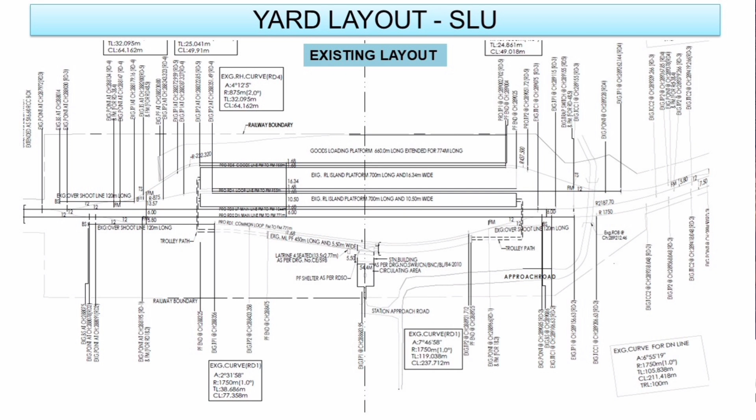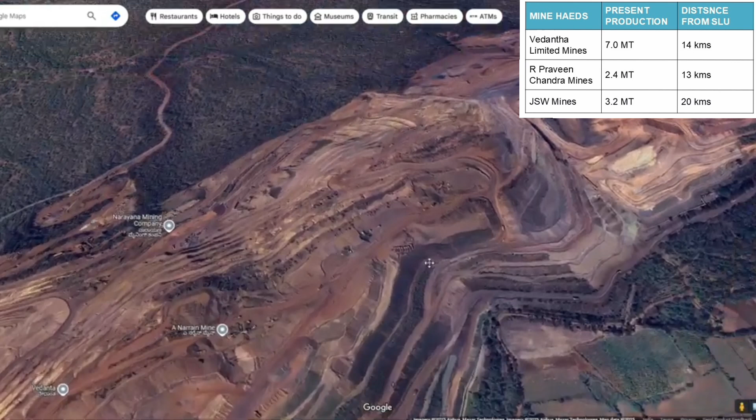Sasalu is a village located in Holalkere Taluk, within the Chitradurga district of Karnataka. The region is strategically significant due to its proximity to iron ore mining zones, which are among the most active in the state. As such, Sasalu serves as a vital node in the transportation of extracted materials by rail. Its development is not only essential for local operations, but also contributes to the larger mineral logistics network in Karnataka.

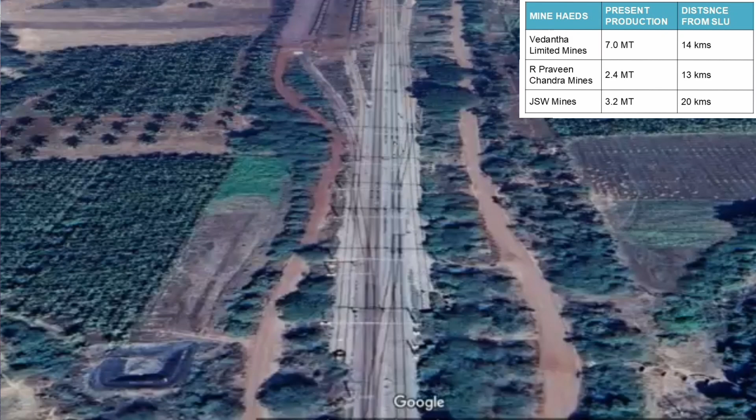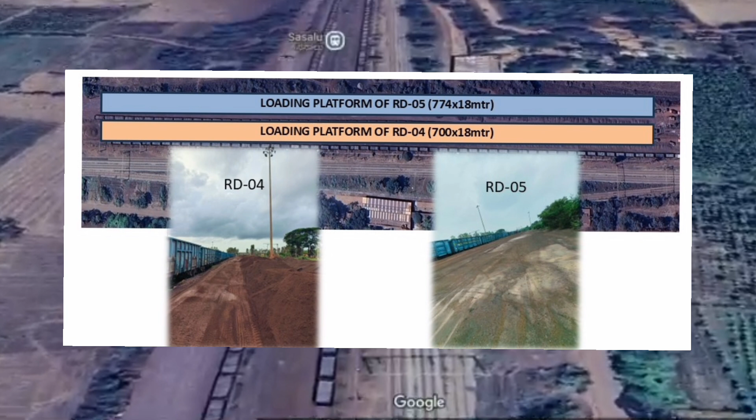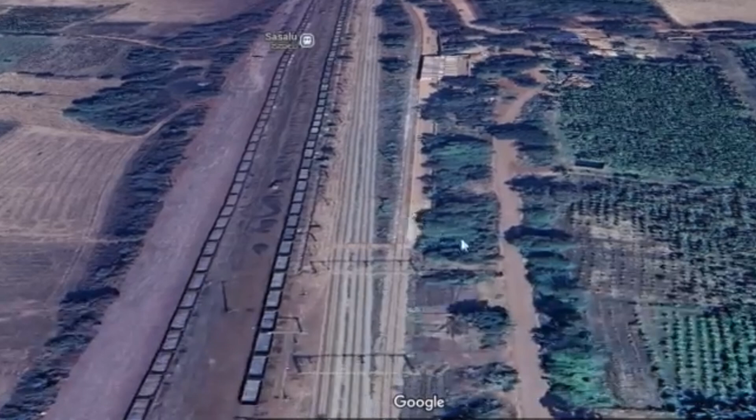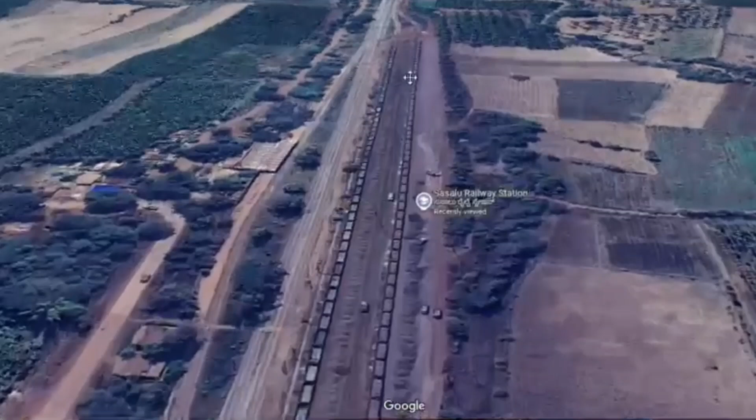The railway yard at Sasalu is currently equipped with two operational loading lines, Road 4 and Road 5. Road 4 has a loading platform measuring 700 meters, while Road 5 features a platform of 774 meters. This existing infrastructure allows for the loading of 2 iron ore rakes per day. However, this capacity falls short when compared to the volume of iron ore extracted daily from the surrounding mining operations. Further constraints such as congestion on the main railway line make it difficult to increase throughput within the current setup.

To address these operational challenges and improve alignment with customer requirements, a yard redevelopment plan has been initiated. The proposed plan includes the construction of 4 new railway lines, out of which 2 will be developed as dedicated loading lines. This expansion will significantly enhance the yard's loading capacity, reduce dependence on mainline traffic, and improve overall efficiency. The upgraded layout has been designed to optimize rail movements, streamline material handling, and ensure that Sasalu remains capable of supporting the region's growing industrial demand.

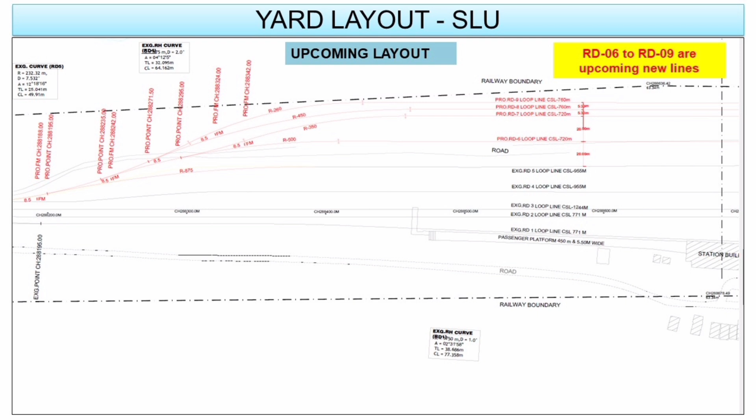It is a forward-looking solution to current limitations and a necessary step towards sustainable rail logistics in a high-volume mining corridor. Iron ore mining at Sasalu began in 1977. Since 1984, mining companies have relied heavily on railway logistics for transportation of extracted ore.

To support this demand, there have been several infrastructural developments over the years, aimed at meeting the evolving needs of mining customers. The loading performance at Sasalu has shown a consistent year-on-year increase, indicating stable demand and operational efficiency. The financial year 2024-25 marked a record performance, with 583 rakes loaded, generating a revenue of over 149 crores.

Interestingly, the highest-ever revenue at this station was recorded in the financial year 2017-18, when just 216 rakes were loaded. But due to a sharp surge in export demand, the revenue exceeded 448 crores.

The major customers operating out of Sasalu include Vedantha Limited, Jindal Steel, and the R. Praveen Chandra Group. The primary outbound destinations from this station include JSW Toranagallu, Mormugao, Panambur Port, Adani Port at Krishnapatnam, along with Kyarkop, Hagari, Somlapuram, and other key industrial hubs. These trends clearly illustrate the strategic importance of Sasalu as a critical link in the iron ore supply chain across southern India.

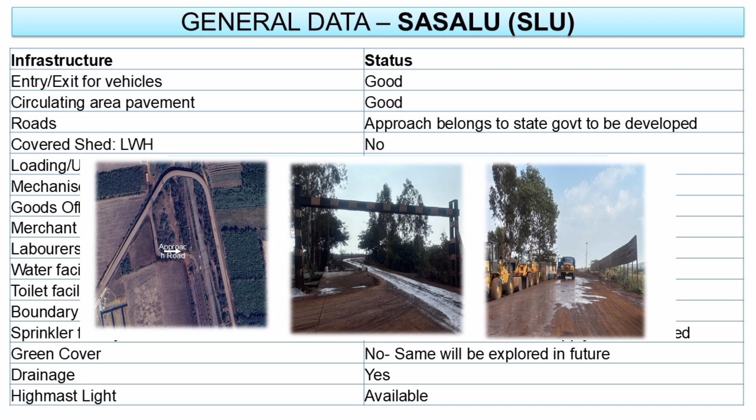Sasalu Yard is supported by a range of basic operational infrastructure. Entry and exit points for vehicles, as well as the circulating area pavement, are in good condition. The approach road, however, belongs to the state government and is yet to be developed. Loading and unloading platforms currently exist, though they remain unpaved. There is a mechanized loading system in place, operating with wheel loaders.

Operational support infrastructure such as the goods office, TMS room, merchant room, and laborers room are all available and functional. Basic utilities, including water supply and drainage systems, are in place. A toilet facility is planned through the provision of a labor restroom with integrated toilets. High-mast lighting is available to support night operations.

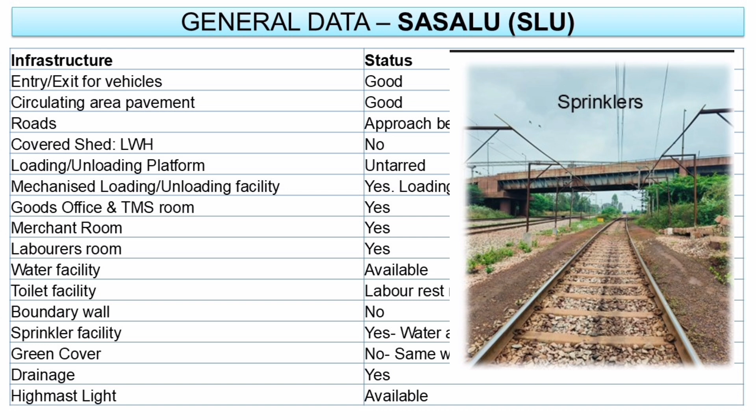However, there is currently no covered shed and the yard is not enclosed by a boundary wall. A sprinkler system has been installed, although reliable water and power supply need to be ensured for consistent operation. Green cover is not yet developed, but the same is proposed to be explored in the future.

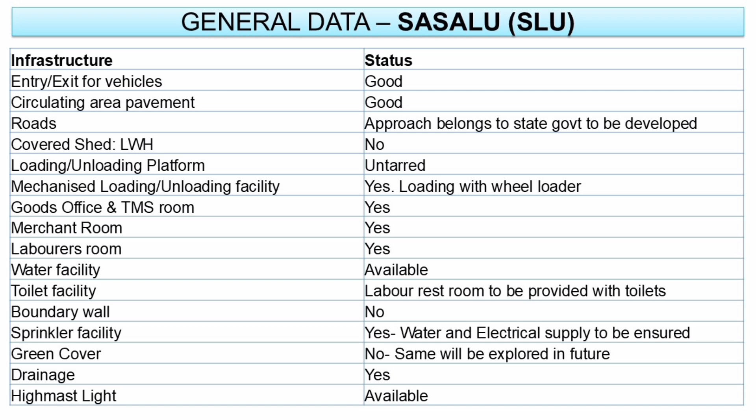Overall, while the core functional infrastructure is in place, targeted improvements are essential to enhance safety, environmental compliance, and operating efficiency. The existing system for material handling at Sasalu is fully mechanized and is being managed efficiently by the respective loading parties. Loading operations are conducted using wheel loaders, which are suitable for the current volume and nature of cargo being handled.

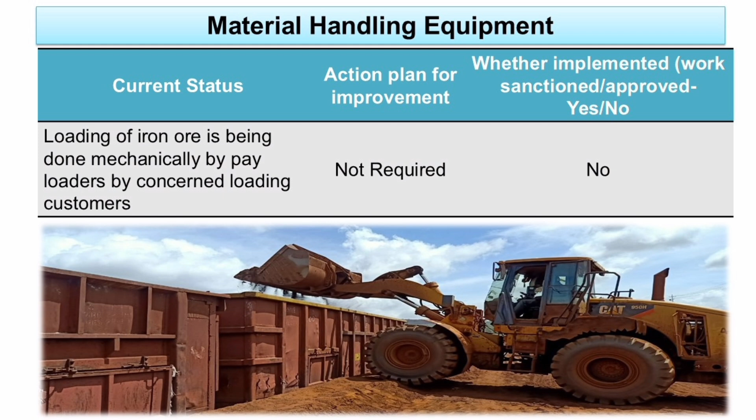At present, there are no additional improvements planned in this area. This is because the current infrastructure is functioning optimally, and no enhancements are warranted or required under the existing operational conditions. The focus, therefore, remains on maintaining the system's reliability and ensuring continued performance without disruption.

Several environmental control measures are already in place or currently under development at Sasalu Yard. Sprinklers have been installed to suppress dust and maintain air quality in loading and circulation areas. A wheel washing plant has been constructed. The civil work is complete and electrical connections are pending to make it fully operational.

Tree plantation efforts are underway, aiming to enhance the site's green cover and contribute to long-term dust and noise mitigation. Additionally, a zinc sheet barricade is being installed to control particulate dispersion. The work is in progress and aligned with safety and environmental standards.

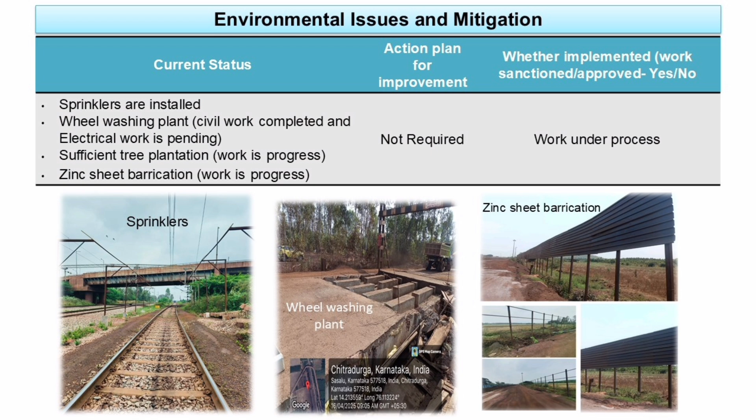At this stage, no further action plans are proposed for these measures, as the current implementations adequately address the identified environmental concerns. All activities mentioned are either already completed or are currently progressing, with appropriate approvals and work processes underway.

Speaking about the existing infrastructure at Sasalu railway station, the wharf area consists of two dedicated loading platforms: Road 4, measuring 700 by 18 meters, and Road 5, measuring 774 by 18 meters. These platforms are currently used for iron ore loading and serve as the designated material handling and staging areas.

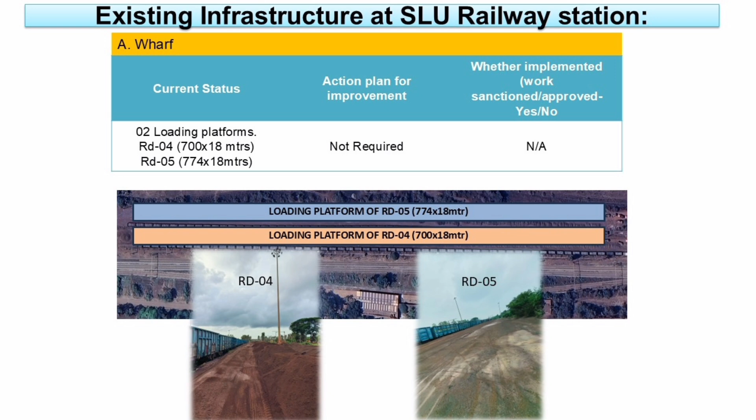The available infrastructure is adequate for current operations, and no further improvement is required at this stage. As shown here in the images, the wharf area is in active use and fully functional. The approach road facilitates the movement of mining trucks and service vehicles to and from the yard.

A significant enhancement to connectivity has been the recent commissioning of a road over bridge, which has eliminated the need for a level crossing gate. This upgrade now ensures seamless and uninterrupted entry and exit of mining trucks, improving both safety and traffic flow.

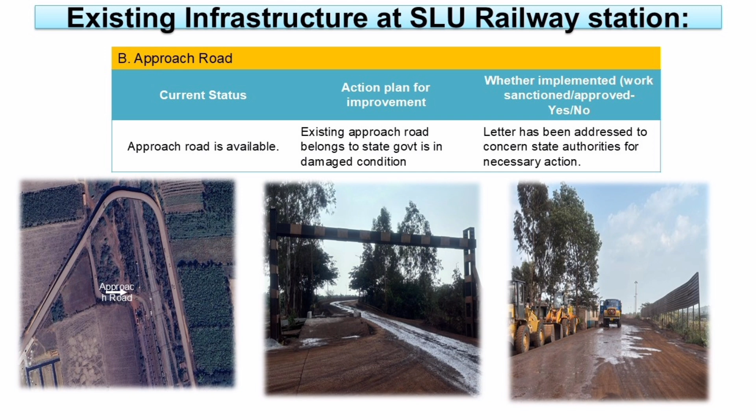However, beyond the railway boundary, the approach road falls under the jurisdiction of the state government and is currently in a damaged condition. A formal letter has been addressed to the concerned state authorities, requesting urgent repair and restoration of the affected stretch. This intervention is necessary to support heavy vehicle movement and maintain overall operational efficiency at the yard.

The yard at Sasalu is equipped with a basic drainage system. However, its performance during heavy rainfall remains a concern. Waterlogging is frequently observed, particularly during the monsoon, which can affect ground operations and movement within the yard.

To address this, the proposed action plan includes the use of geotextile drainage layers to improve subsurface water flow and prevent blockage caused by silt and debris. As of now, this improvement is not yet sanctioned or implemented.

Moving on to the railway tracks. Currently, 2 tracks are operational at the loading area within Sasalu Yard. An extension of Road 4 by 750 meters is planned to increase operational flexibility and loading efficiency. This work is under execution and is progressing under Plan Head 16 provisions.

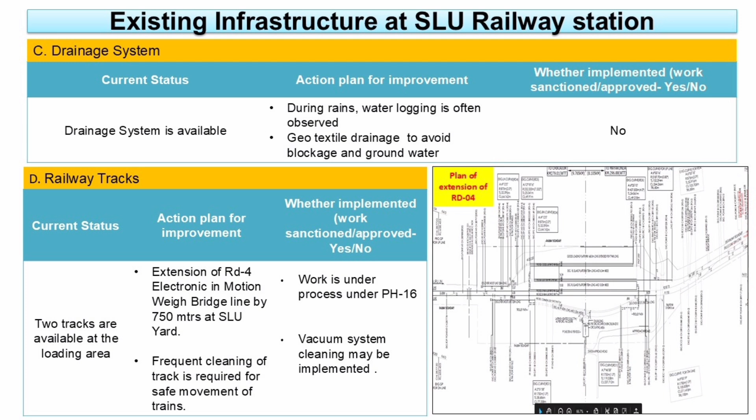Additionally, the plan includes the implementation of a vacuum system for regular and effective track cleaning. This will enhance safety and ensure smooth rake movement, particularly in areas prone to iron ore spillage and dust accumulation. These infrastructure upgrades are critical for maintaining reliability, improving operational turnaround, and supporting future loading volumes at Sasalu.

A commercial plot of 25,000 square meters, located adjacent to Road 5, has been temporarily allotted to a customer for use as a storage and stacking area. This allocation is valid for a period of 6 months only.

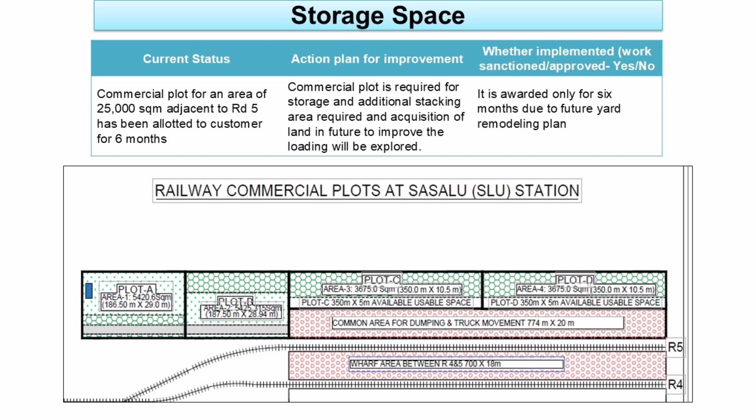Considering the proposed yard remodeling plans that are expected to take shape in the near future, there is a recognized need for a permanent commercial storage area to support additional stacking, streamline loading operations, and handle higher cargo volumes more efficiently. As part of long-term planning, the acquisition of additional land will be explored to enhance loading capacity and operational flexibility. This approach ensures that short-term operational needs are addressed, while keeping the larger redevelopment vision in consideration.

Currently, minor wagon repairs at Sasalu are handled by staff from Chikkajajuru, which is located 12 kilometers away.

On average, this results in a response time of nearly 1 hour, leading to operational delays in cases of minor but urgent wagon damage. To address this gap, it is proposed to establish a carriage and wagon depot directly at Sasalu. This would enable immediate attention to issues such as floor or side body damage, door hinge failures, and channel damages, ensuring minimal disruption to loading operations.

The proposal has not yet been sanctioned, but it is operationally justified as Sasalu also serves as an alternative iron ore loading point for MMEC siding. Regarding the weighbridge facility, an electronic in-motion weighbridge is already available at Sasalu, with an alternate facility at Chitradurga.

Under Plan Head 16, the extension of Road 4 by 750 meters is currently underway to ensure weighment operations are conducted without interfering with mainline shunting.

An additional EIMWB is proposed at Halyuru, which is currently under review by the mechanical branch. Looking ahead, an AI-based interface for rake load monitoring is also being considered to enhance data accuracy and operational transparency.

The extension work is in progress, with a target completion date of 31st August, 2025.

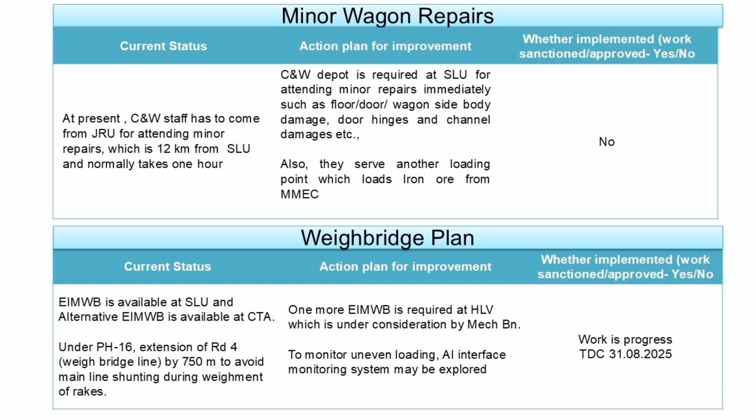At present, a merchant room and a basic labor room exist at the site. To enhance labor welfare, a dedicated restroom has been proposed. It will feature toilets, urinals, a bathing area, seating space, and safe drinking water.

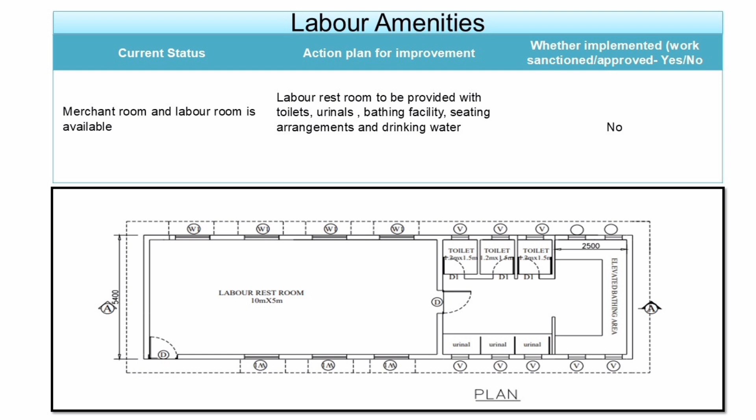As of now, the project is in the proposal stage and has not yet been sanctioned. The planned layout covers a 10 by 5 meter area, with clearly marked sanitation units and a designated water point. Once approved, this facility will significantly improve working conditions for the labor force at Sasalu.

At present, there is no dedicated truck parking facility at Sasalu. All trucks, owned by mining companies, are currently parked 15 kilometers away, at a private yard. To ease truck movement near the goods shed, an expansion of the approach road junction near RD5 has been proposed. This will ensure smoother entry and exit of trucks, helping reduce delays, congestion, and safety risks.

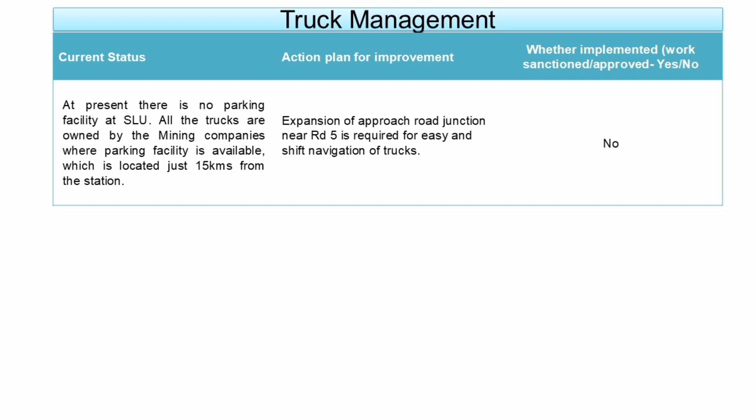However, this proposal is yet to be sanctioned. Once approved, the improved road layout will greatly streamline truck flow and enhance the operational efficiency at the goods shed.

Currently, the Chief Goods Supervisor's office at Sasalu faces severe space constraints. This makes it difficult to manage key operations, such as FOIS, CCTV monitoring, and record keeping.

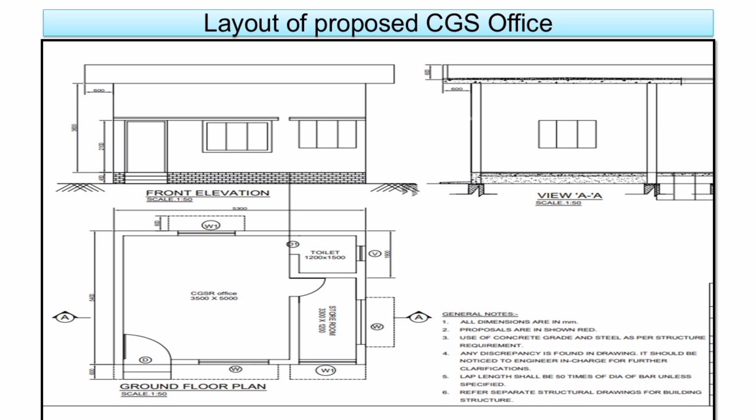To resolve this, a new CGS office has been proposed within the goods shed area. This office will be purpose-built to support digital systems, organized documentation, and better supervision. While the proposal is not yet sanctioned, once approved, it will provide staff with a more efficient and organized workspace, improving visibility and overall control of operations.

At present, loading and leveling operations in the yard are monitored through a temporary setup, just two CCTV cameras placed at the CGSR office, offering basic surveillance. To enhance real-time coordination, one walkie-talkie is also planned for the CGSR, ensuring effective communication with the station master during operations.

Looking ahead, a more comprehensive surveillance system is being implemented. The installation of 7 CCTV cameras at the Sasalu goods shed has been sanctioned under the umbrella work for 2024-25.

This strategic upgrade, estimated at 19.88 lakhs rupees, was officially handed over to CSTE Project SPC on 15 April 2025, based on the recommendation of PCSTE SWR UBL. The work is scheduled to be completed by 31st August 2025.

Improving the cleanliness and overall upkeep of the goods shed is a key focus area. Firstly, a wagon sweeping contract is currently under process. This will ensure regular and systematic cleaning after each unloading operation.

Secondly, it is proposed that an imprest be provided to the CGSR. This would allow for on-the-spot housekeeping, especially around the goods shed and the electronic in-motion weighbridge area.

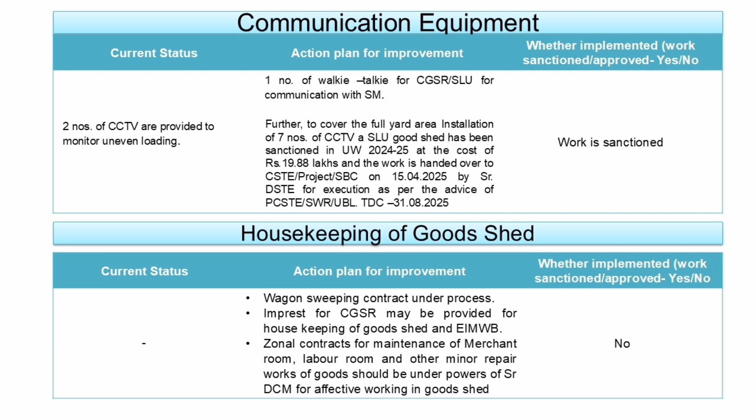Lastly, it is recommended that zonal maintenance contracts, covering facilities like the merchant room, labor room, and other minor repairs, be brought under the administrative control of the senior DCM. This change will enable faster decision-making and improve the timely upkeep of essential infrastructure.

Together, these focused interventions, from infrastructure upgrades to better surveillance, efficient office space, and improved housekeeping, reflect a clear vision to transform Sasalu goods shed into a model of operational excellence and safety. These proposals, once implemented, will not only ease daily operations, but also set the stage for long-term, sustainable development.